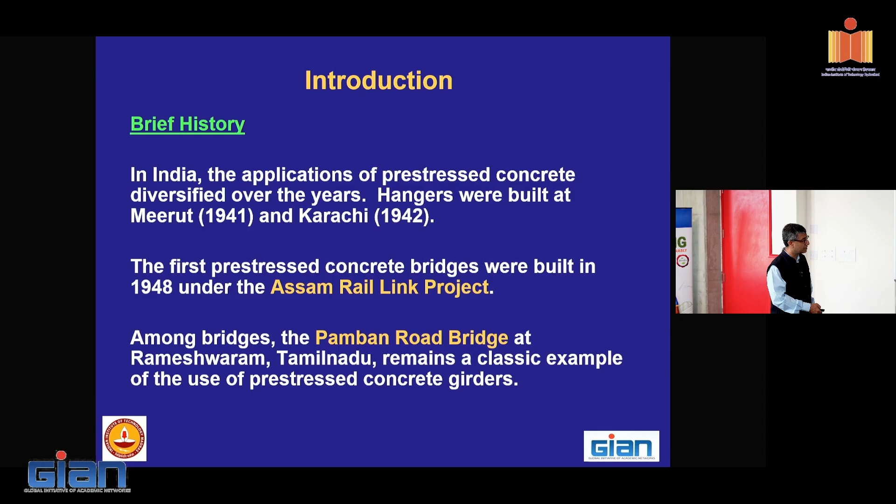Whenever I teach an application-oriented subject to my students, I always speak about the pioneers of our country, because many times our students are not aware who the pioneers in our country are. But we should have faith that we do have several role models.

In the Assam Rail Link project, the person who was in charge was Karnail Singh. There is a nice report by him, a complete story of the Assam Rail Link project. It's quite a vivid document of the full project, and it is available on the internet. And he got help from John Gammon, who started the company called Gammon India Limited.

From Gammon India, there is one person, V.N. Heggade, who is still there, who has written a wonderful article, Evolution of Precast Segmental Technology of Bridges. These are a few names who were involved in this Assam Rail Link project.

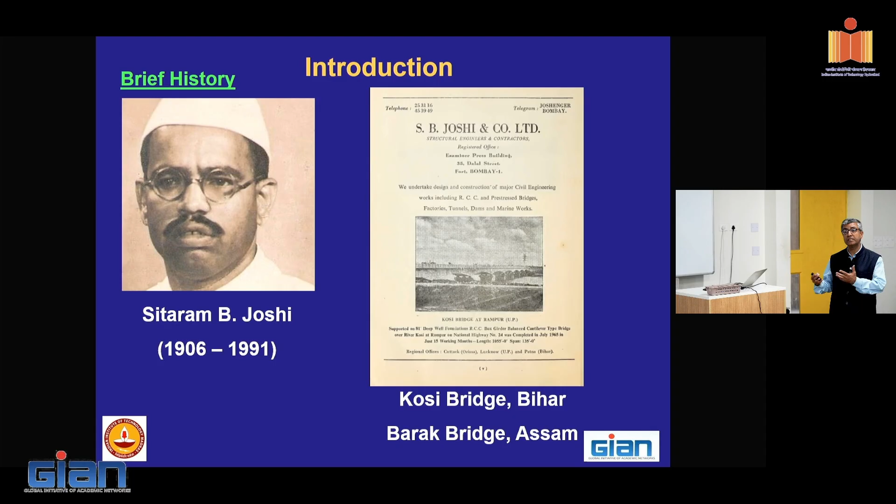Another person, Sitaram Joshi, he was Gandhian in his philosophy. He used to wear that type of dress. But you can see this way back, right after independence, this is a copy from one advertisement of his company, which was making Prestressed concrete bridges. At that time also we were aiming for Atmanirbhar Bharat.

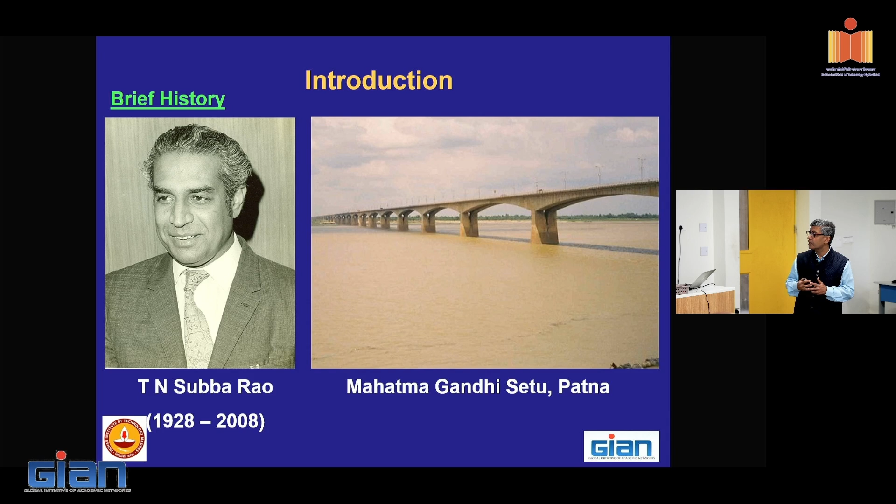T.N. Subba Rao from Gammon India was a pioneering person who has developed, and who is associated with John Gammon, and he has been felicitated in Europe. These are the wonderful Prestress bridges which have been done by Gammon India.

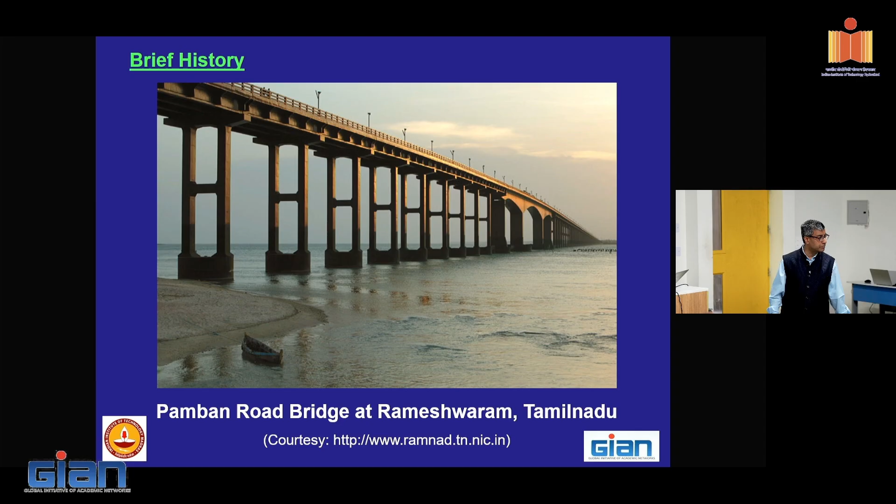This was built around the 1970s, I think 72, 73, whereas the drawbridge was built around 1911 or 12. And the drawbridge again has been refurbished. Chander Alimchandani from STUP has been felicitated by the FIB, the European Concrete Society. His company, STUP, has also been very much involved in Prestressed concrete.

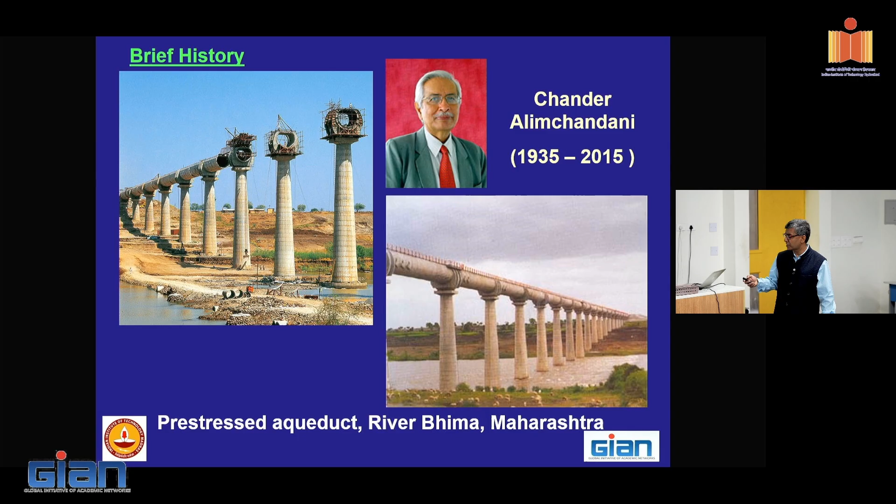Mahesh Tandon, today in fact Mahesh Tandon is in IIT Madras, speaking in the Institution of Bridge Engineers conference there. Mahesh Tandon was educated at the University of Hawaii, and his company, Tandon Consultants, did a lot of work on viaducts, metro viaducts. Another person of his company, Vinay Gupta, gives a lot of seminars.

Coming to advantages of Prestressed concrete. Why do we go for prestressing? The initial thought was that if we can have concrete to be uncracked under service conditions, then the durability improves. And definitely that's a big advantage, that due to it being uncracked under service conditions, we can have increase in durability. This is something our generation is facing, that it is not that every time we will be constructing new stuff.

You have to rehabilitate the existing stuff. If we can delay the need of rehabilitation, that is definitely better, and prestressing is beneficial in that.

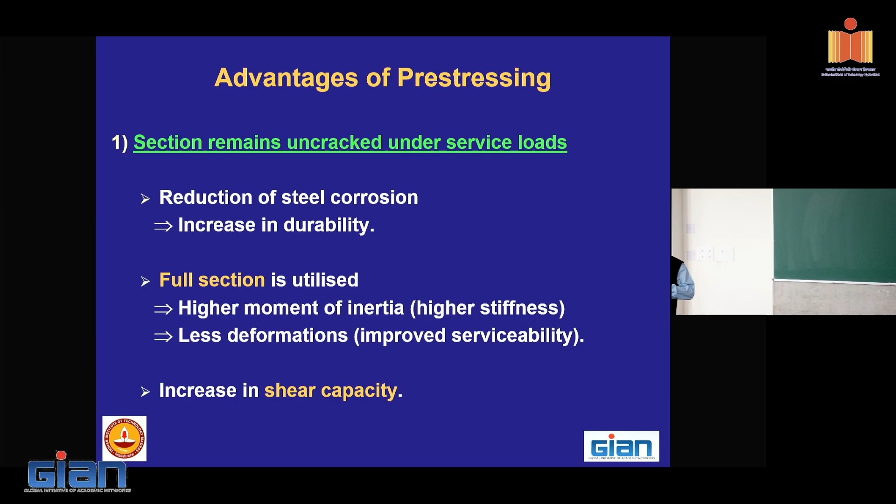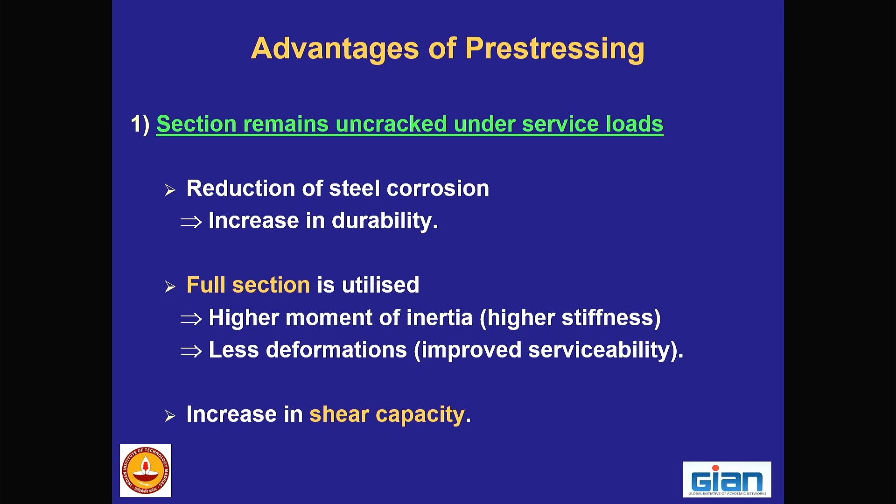In terms of the design, full section is utilized in terms of section properties. We can use the uncracked moment of inertia, and it improves the deformations, and we also get benefit in shear capacity.

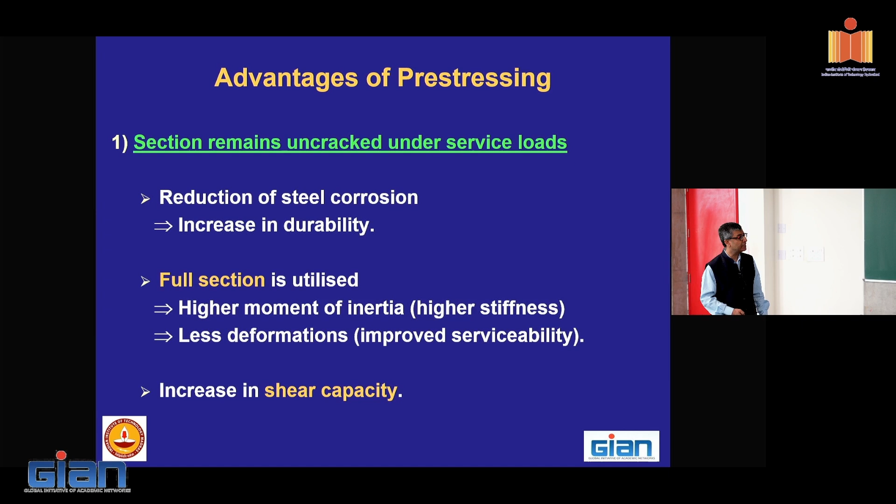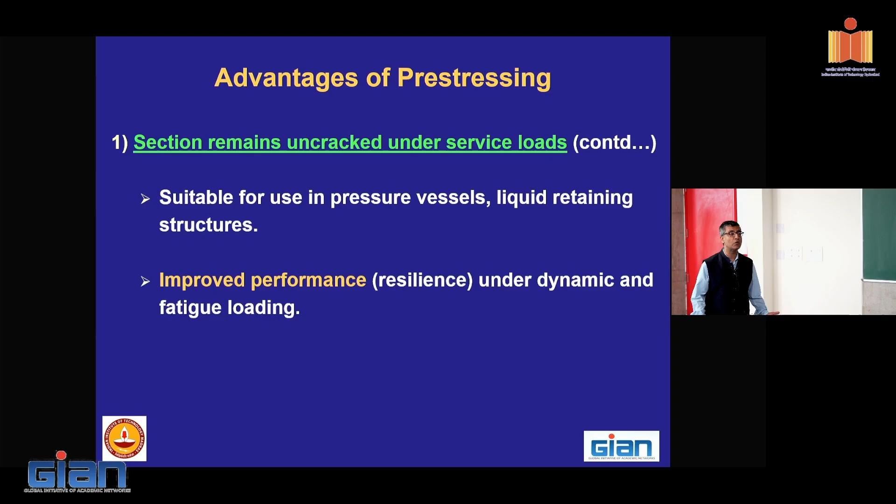If you are talking of any liquid retaining structures or even very high-end structures like nuclear containment structures, then definitely we go for what is called leak proofness, and there prestressing is beneficial. If you're talking of dynamic loads, repeated loads, like fatigue issues, we can go for prestressing, like railway sleepers.

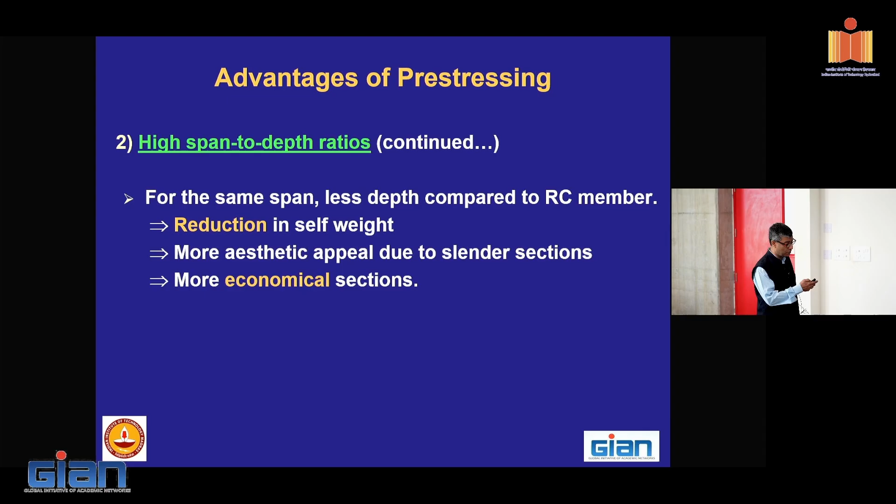And the corollary is that once we can go for a reduced depth, it leads to a reduction in the self-weight. For bridges, this is a factor, because in bridge design, the self-weight moment itself is substantially high, comparable to the live load moment. Now, if the self-weight moment can be reduced, then it is advantageous in terms of design. We can have an economical solution.

However, what are the challenges? These same challenges are there in precast also. Skilled technology - in our country, sometimes even our students think that what is there in concrete? You just mix something and pour something. But no, we have to go for very high quality products. Both pre-stressing and precast need skilled technology. Use of high strength materials is costly. Yes, if you are talking of ultra high performance concrete, we can solve many problems, but we also have to pay the price.

There is additional cost in auxiliary equipments. For pre-stressing, if you are a contractor, you have to bring in those equipments, and we have to have the quality control and inspection. Same applies for precast, that in order to get the benefits, first you have to pay the price in terms of good inspection.

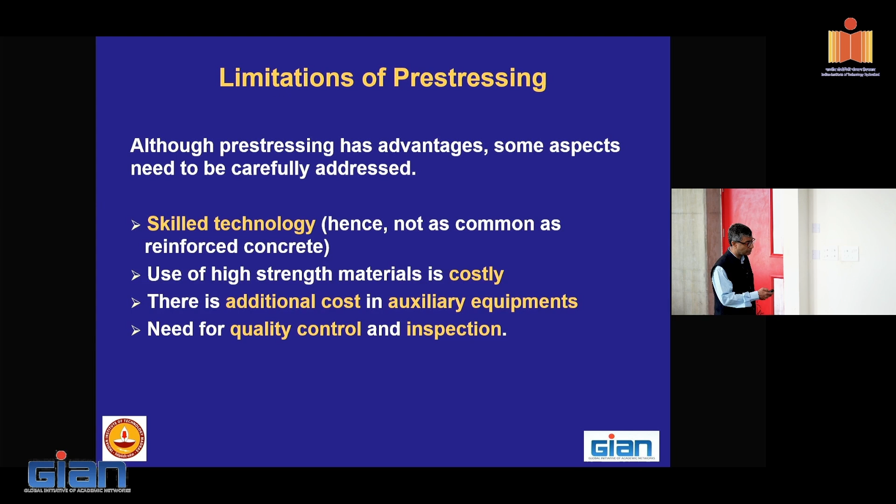Now, the types of pre-stressing - there are different ways of classifying. It can be how you are applying the pre-stressing force. Typically, we apply that by hydraulic jacks, but there are other ways of applying.

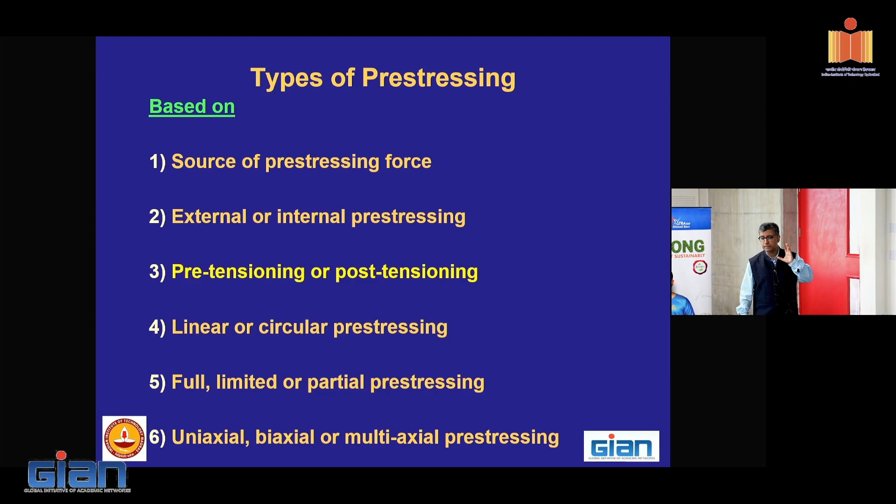External or internal - this is more used in bridges, that our ducts can be inside the section or the ducts can be outside the section. Outside the section does not mean that they are always visible. Like in a box girder, the ducts can be inside the box, but not within the section. And their analysis is slightly different compared to a duct which is inside the section.

Now, this is the classification today which we will be talking about - pre-tensioning or post-tensioning. I will come into that later. Linear or circular - for most of the linear members like girders or slabs, although the profile may be slightly curved, we say it's a linear pre-stressing. Whereas if you are going for pre-stressing pipes or containment structures or domes, then these are circular pre-stressing.

Full, limited or partial - this classification is more of a design perspective. In the earlier days, the idea was that we shall have concrete uncracked under service condition, that is called full pre-stressing. But then it was found that that is uneconomical. Most of the time we do not have the characteristic load, and if you are targeting uncracked under characteristic load, then it is uneconomical. Hence we say that, okay, let it crack under the characteristic load, but most of the time we do not see the characteristic load.

As per the definition of the characteristic load, only 5% of the time we may expect it. Rest of the time the load may be much less, and whatever cracks may form in case the characteristic load is there, that will get closed. That is called limited prestressing. That means we are relying on the prestressing to check cracking for most of the time, but need not be for the characteristic load.

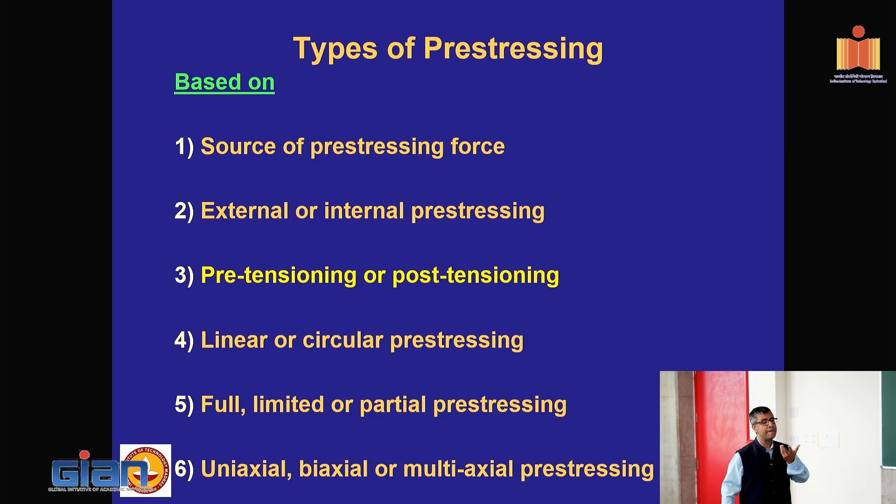Partial prestressing is a very generic term. It means a mix of reinforced concrete and prestressed concrete. Full prestressed concrete is one end of a spectrum, and reinforced concrete is another end. Anywhere in between, a mix of reinforced concrete and prestressed concrete is partial prestressing. You can say that the prestressing is primarily for the dead load, whereas for the live load, I will take advantage of the reinforced concrete. The way you select it is a very case-to-case basis.

Uniaxial, biaxial, multi-axial - in a beam, we have prestressing only in one direction, whereas in a slab, we can have prestressing in two directions, and for a dome, we can have prestressing in like three directions.

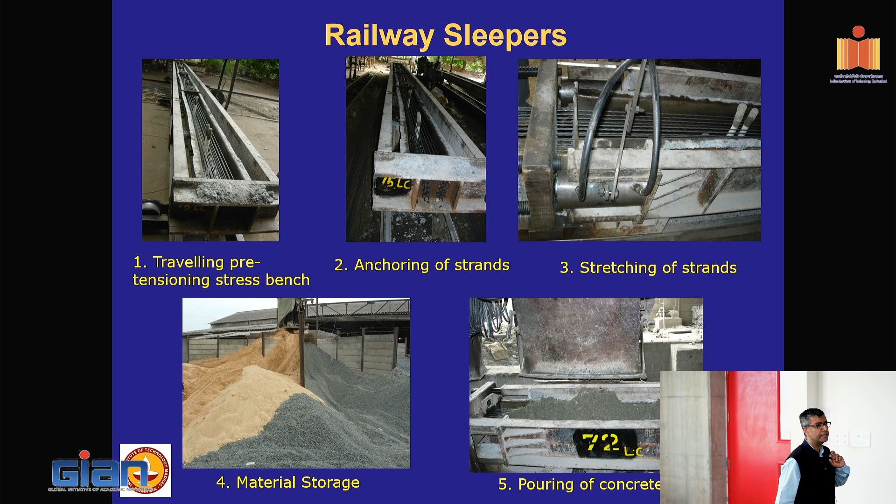Okay, trying to quickly go through the process. Pre-tensioned is typically used for members which are produced in bulk. It is easier to produce smaller members in bulk like railway sleepers, but we can also have bridge girders which are being pre-tensioned. Now, in a railway sleeper, we will be having like a traveling stress bench.

What is a stress bench? It is like a mold with - it's a self-straining frame, I would say, not a mold, self-straining frame which can move around on rails. First, inside this self-straining frame, there is a mold. We are putting the strands, we are anchoring the strands, then we are stretching the strands, and this can be monitored by some scale or some pressure gauge. Once we have stretched the strand, that's the pre-tensioning.

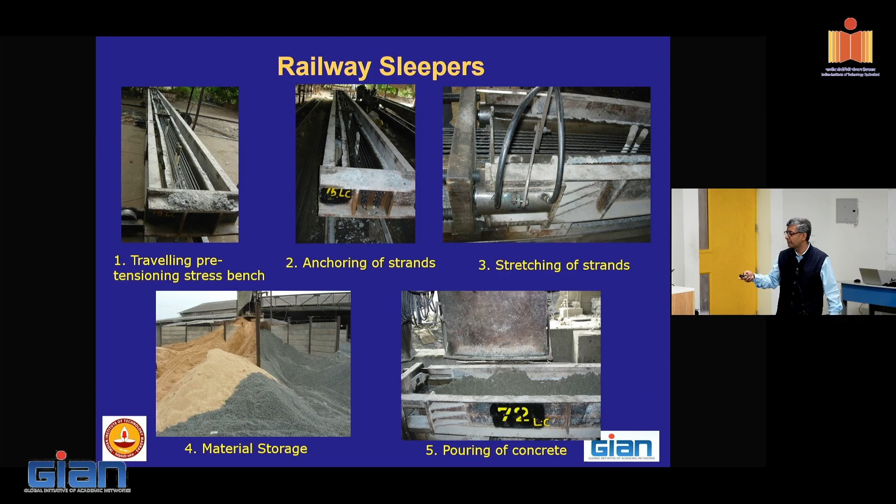Then we are pouring the concrete. We have a batching plant. Through a hopper, we are pouring the concrete, and then we are vibrating the whole mold itself, and then we are pushing this whole stress bench through the rails into the curing chamber, steam curing.

We keep them there for about 24 hours. After that, they are brought out and the molds can be released, because in a factory we need the molds very quickly. They are cut, demolded, and then water cured again for maybe 24 hours, which is equivalent to almost 7 days of curing. That means for another 2 weeks they will be curing separately in water tanks, and then they will be dispatched.

This is a complete industrial process, and if you go to railway sleeper factories, there are several of them in our country. The first generation of pre-tensioned sleepers are now being replaced, which means this industry will go on because this production, these are also precast pre-stressed.

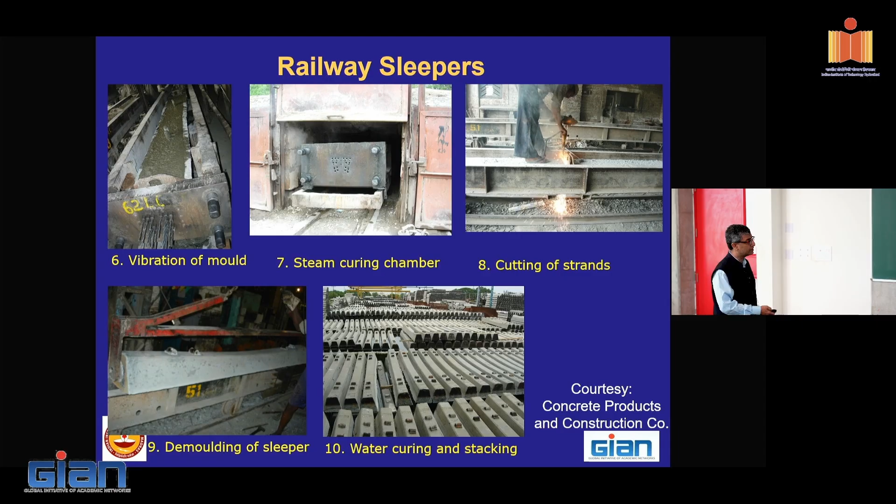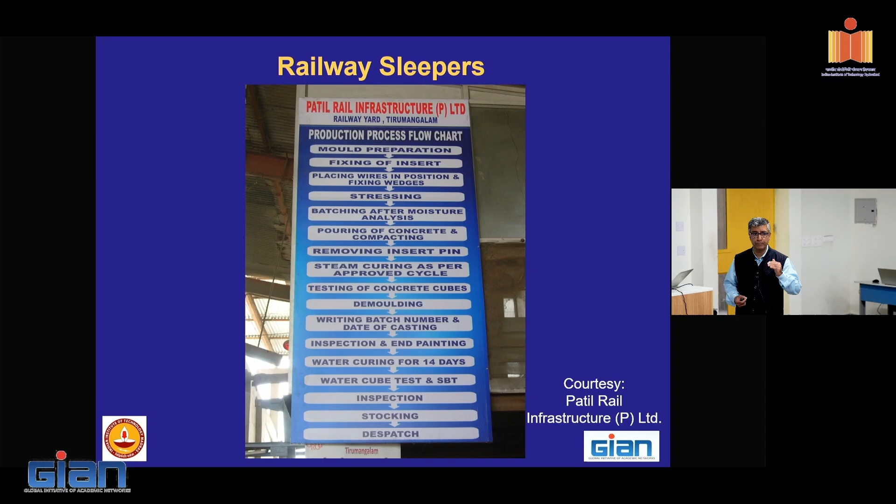Next is the post-tension members. Here also, the way I am talking about post-tension is just with reference to precast. That post-tension can also be used in precast. This is a site which I visited in Ernakulam, a post-tension box girder.

Here you can see the reinforcement has been fabricated, the ducts are placed, then this mold is taken to this casting yard. Once the concrete has been cast, the strands are passed through the ducts, and then against the hardened concrete, the strands are stretched. That means here the concrete is cast first and then the strand is stretched.

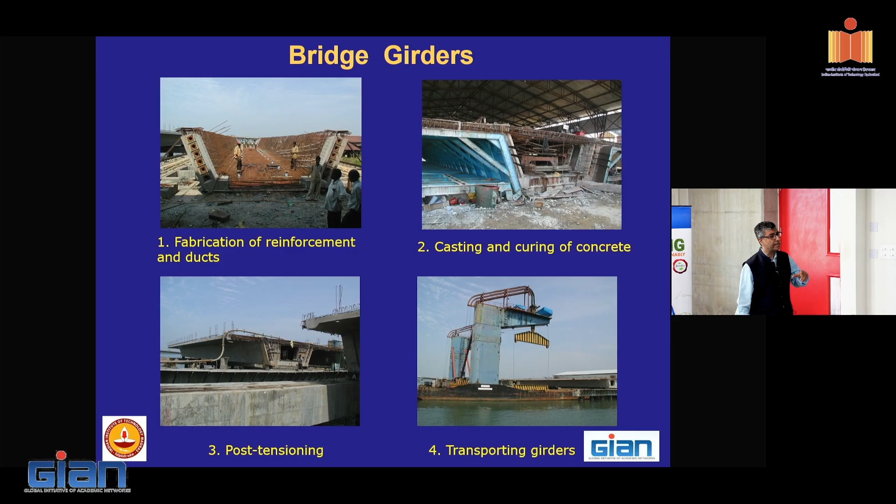And this can be done in stages. That means a few strands are stretched at the site, then they are taken maybe through some floating cranes. This was in the construction of a bridge, and then at the final location, again some more strands can be stretched. Now this is the final form of the Goshree Bridge in Cochin, quite a picturesque location, and this was a prestigious project undertaken by the Cochin Port Trust at the time.

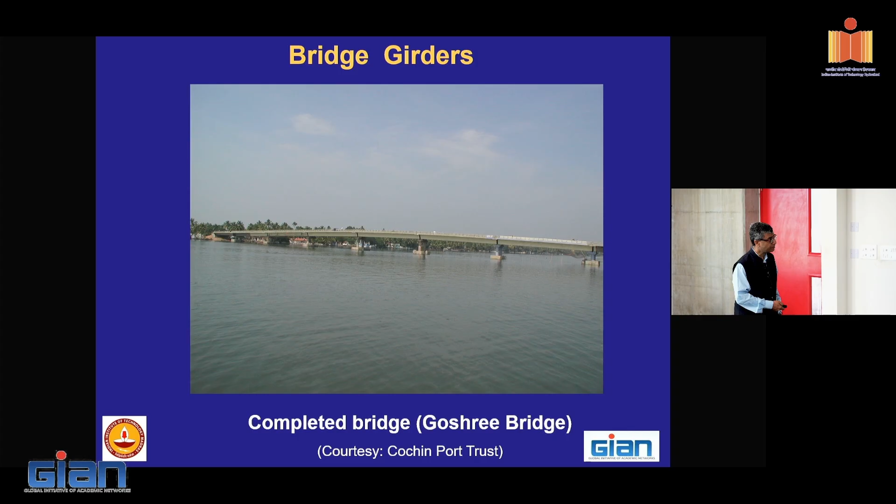Coming to other types of bridge girders, this is from the Chennai Metro Rail project. These are the molds, the concrete is being cast, and these are the anchorage blocks at the end, which are required to reduce the bearing stress that comes during post-tensioning.

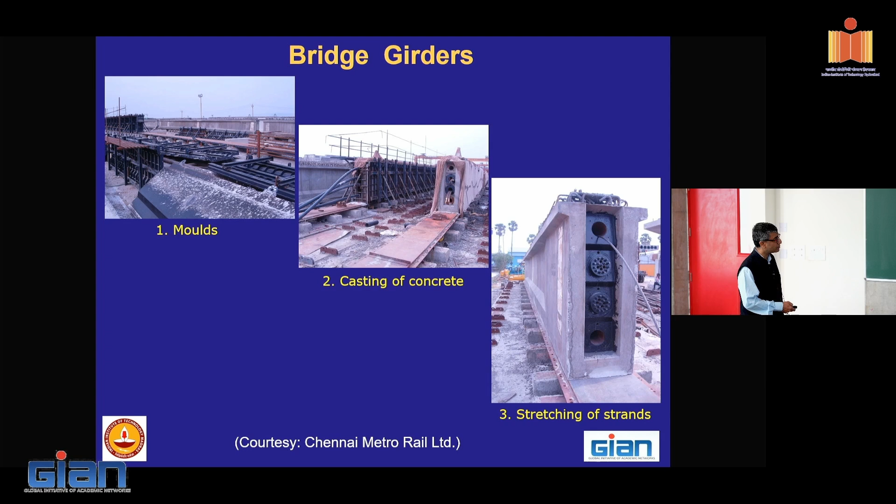Now what are the advantages of post-tensioning compared to pre-tensioning? If it's a very heavy member, post-tensioning can be done right at the site itself; I do not need a factory to do post-tensioning. In our country, bridges were mostly post-tensioned earlier, though now we are seeing pre-tensioned girders coming in. There is also less waiting period in the casting bed.

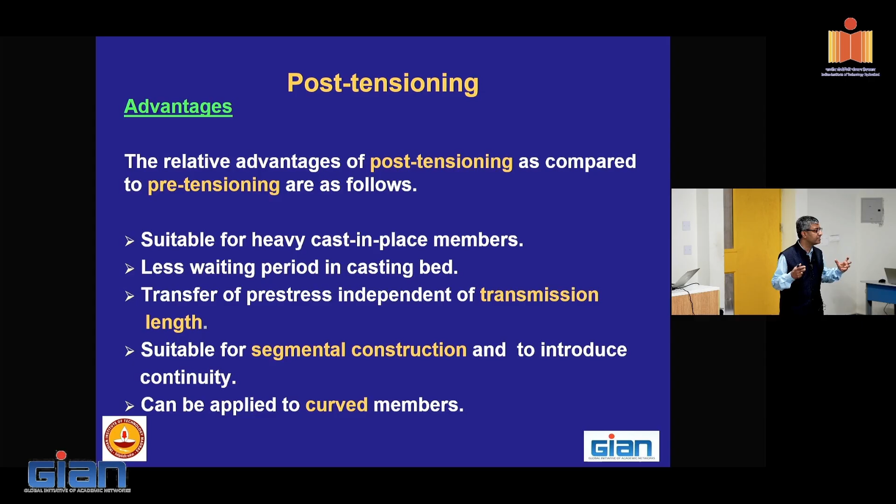What it means is that we are not transferring the stress to the concrete as early as we do in pre-tension. Once the concrete gets a minimum strength, it can be demolded - transfer of prestress independent of transmission length. Here we have physical anchorage at the end, anchor blocks, so we do not depend upon bond to transfer the prestress; it is the anchor blocks which transfer the prestress.

Suitable for segmental construction - this is a technique which has become quite common for viaduct construction. It can also be applied to curved members. Pre-tension members cannot be used for horizontally curved members, whereas post-tension can be used.

Now what are the relative disadvantages of post-tensioning? We need ducts, anchorage devices, and grouting. This is a very important aspect of post-tensioning. In pre-tension, the strands are in direct contact with the concrete, so there is good transmission of bond, provided the concrete has been cured, and we can have some minimum durability satisfied if the concrete is of good quality.

Whereas in post-tension, there is a duct which is a void. Through that we put the strands, and then we grout it, and the grouting should be high strength and non-shrink. We expect the grout to fill up the full space, which itself is a challenge, and how durable this grout is, that's the challenge.

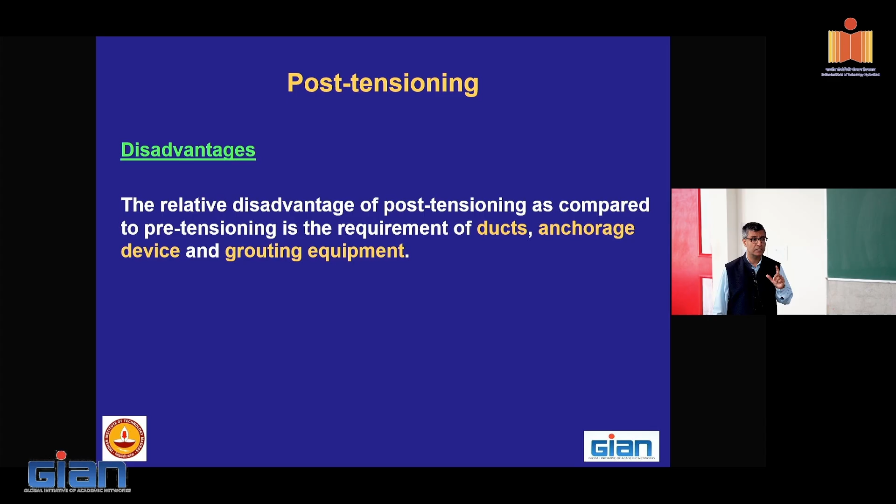In our country, we are in a hurry to have our infrastructure developed, but this is one area where the future will tell how well we have done it.

Professor Radhakrishnan is very much passionate about talking about grouts.

Now, what are the devices we need for post-tensioning? We need a casting bed. We do not need any pre-stressing bench as such, because we are doing the pre-stressing against the member. Of course, we need mold and shuttering. We need ducts, anchorage devices—very large anchorage devices. Jacks, couplers if you are going for continuous members, and grouting equipment.

Why I have written optional is, in a country like US, sometimes they do not go for grouting in post-tension slabs, because they say the slabs are building members which are in an interior environment, so let's get rid of the grouting. By that, they're reducing the cost. In India, the precasters don't take the risk—even for post-tension slabs, they go for grouting.

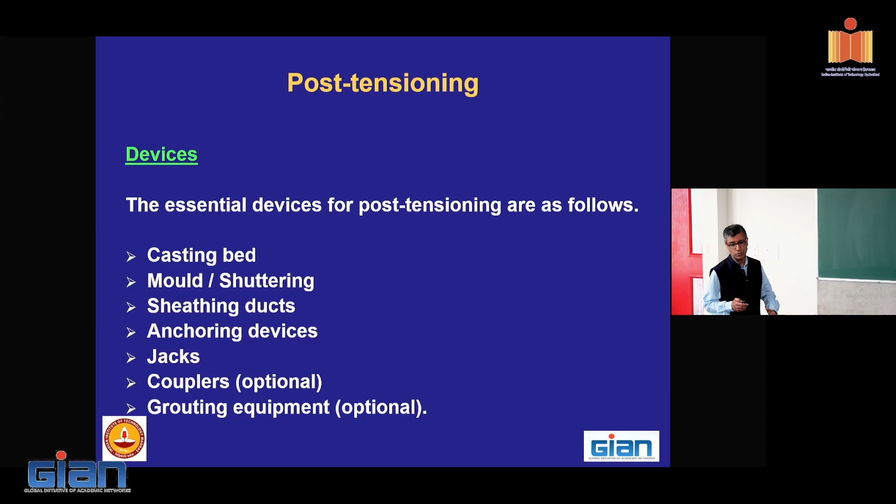So without grouting, there will be a gap between the concrete and the strand. Then the analysis is different. The unbonded post-tensioning analysis is different compared to the bonded post-tension—that is one difference. In terms of durability, you have to use special purpose strands which are encapsulated so that you can increase their longevity.

If suppose there is no anchoring... No, the anchoring has to be there. Anchoring is there, it's already along with the member.

The nice thing of unbonded is, these days they are going for a mix of bonded and unbonded tendons. The reason is, unbonded tendons you can replace. That is a nice aspect—if in future you suspect you need to upgrade, you keep some extra ducts free. You can put some strands later on, or replace some of the unbonded strands with new ones. This is also done especially in bridge girders, they keep extra ducts in place because we are not sure how well they will perform 50 years down the road. We have a provision to strengthen them in future.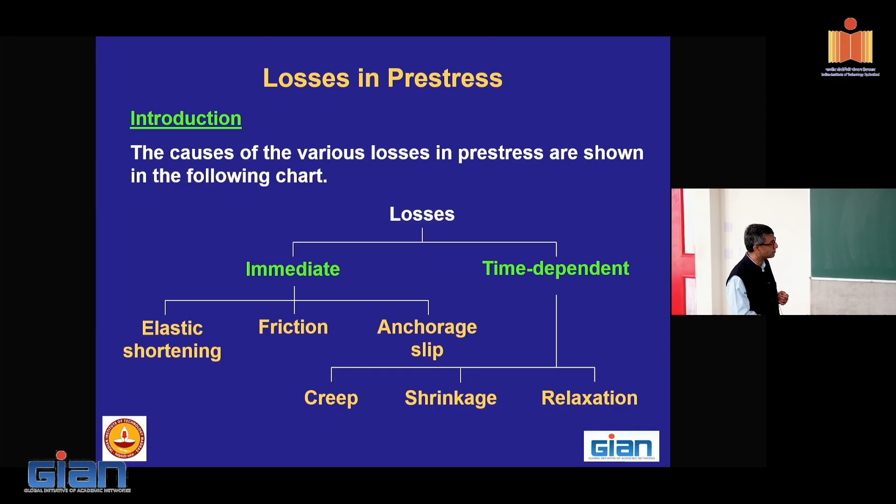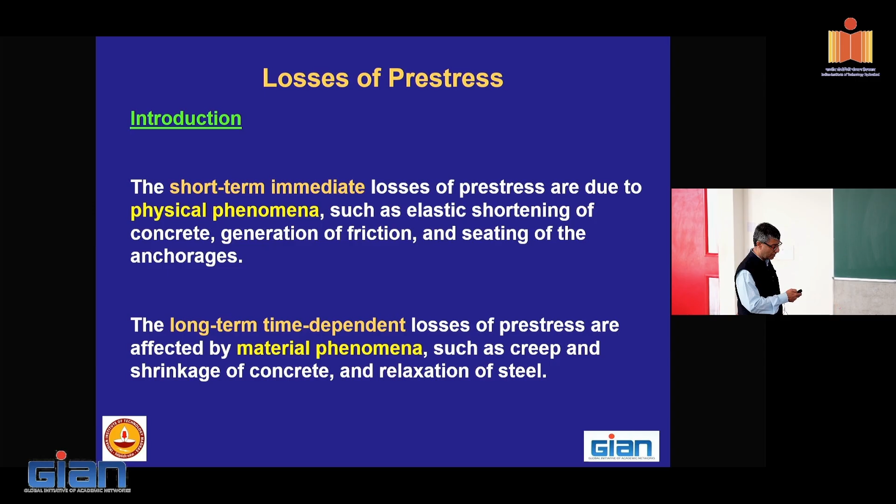This is the write-up: the short-term immediate losses are a physical phenomenon, whereas the long-term time-dependent losses are a material phenomenon. Again, as I said, this is just 3 slides on losses, which I typically cover in at least a week or two weeks. Next comes the analysis.

Now, this is important for this particular course. First, to understand the effect of pre-stressing on the stresses. A very important aspect of prestressed concrete is the computation of stress, first at the transfer. At transfer, the concrete is still not strong enough. It depends—the contractor will try to transfer the pre-stress as fast as possible to release the molds. But you, as an engineer, will say, no, please wait, let the concrete mature properly. Only then should you transfer the pre-stress.

The stress check here is for an axial member, like a railway sleeper. The stress in the concrete at transfer is the pre-stressing force that you are recording, P0, divided by the area of the concrete. The sign convention I am using is that compression is denoted as negative. Now this P0—there can be some short-term loss due to elastic shortening that you have to be careful about. And this is the stress. First, you have to make sure that it is within the allowable value of pre-stress for that particular age of concrete.

That means if I am transferring the pre-stress after 24 hours of steam curing, which is equivalent to 7 days of moist curing, then whatever strength it is supposed to gain in 7 days, there is a corresponding permissible stress, and this particular stress has to be less than that permissible stress.

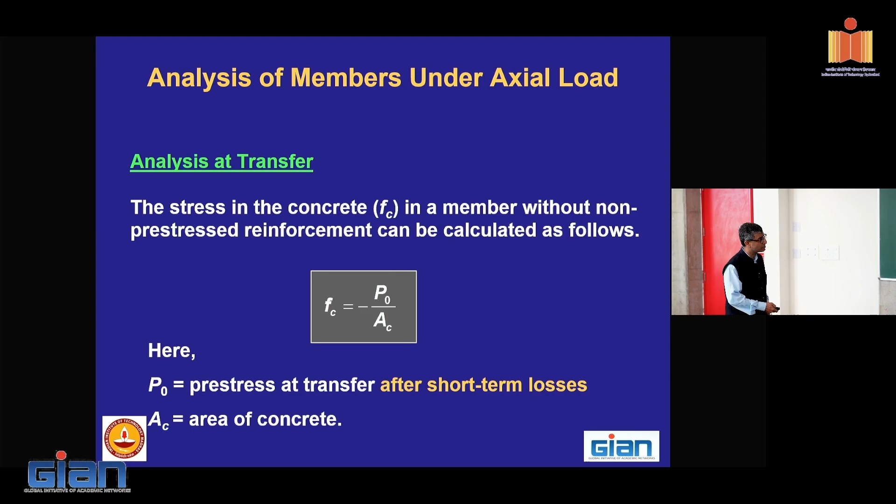Next comes the analysis at service loads. Under service loads, the first term is similar to what we had seen earlier—due to pre-stressing, there is a permanent stress. However, please note, the pre-stressing force will gradually drop over a period of time. Hence, from P0, we now say that at service condition, the stress is denoted as PE, which is the effective pre-stress after a certain time. To this pre-compression, we are adding whatever stress comes due to the external load. If the external load is tensile, it is a positive sign; if the external load is compressive, it is a negative sign.

Axially loaded members typically are members which are under tension, like railway sleepers, because the tension comes to the bending, or it can be ring members at the base of domes, or it can be some tie members.

Hence this pre-stressing component will typically be positive—it's the tension which is coming, and in the denominator we have the transformed area, a more precise way of saying that the steel is also participating along with the concrete to take tension. Now this stress should be less than whatever is the allowable value under service condition.

Now coming to the members under flexure. Why is the analysis important from the structural design point of view? First, right now we just say the permissible pre-stress based on allowable stresses at transfer.

For pre-stressed concrete, whether pre-tension or post-tension, whenever you are transferring the pre-stress, that itself is a critical time for the member.

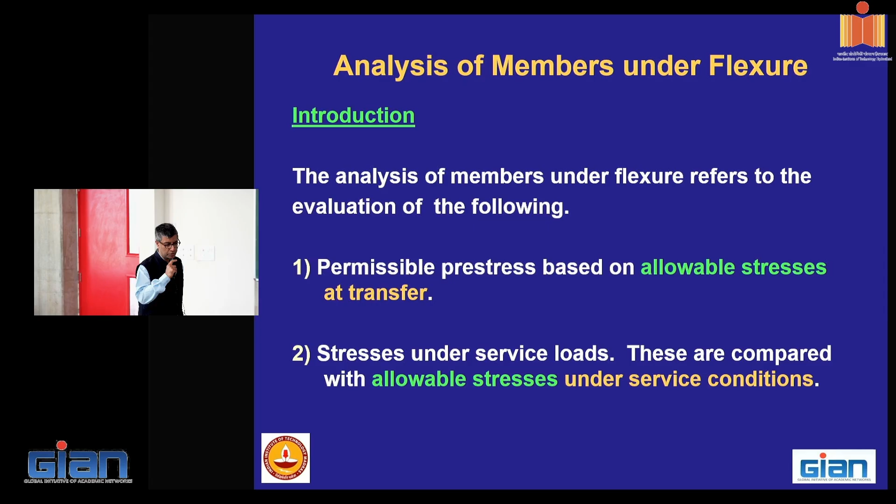I have seen when I went to Coimbatore PSG Tech, one day I was walking in the morning and they were jackhammering an overbridge across the road in front of PSG Tech. I said, what happened? It looks like a new construction. They said that during post-tensioning, this concrete cracked. Now the university management is saying they will not accept it, it has to be demolished. That means the contractor had to demolish a newly constructed bridge which cracked during the post-tensioning.

Hence it is very critical—it is easy to give a lecture in the room, but it is a difficult thing in practice because concrete can have weak spots, it can be variable throughout the length of the bridge, and hence we have to be very cautious that during the time of transfer we have sufficient material strength data to decide whether we can transfer the pre-stress or not.

Next, under service conditions, the stresses also have to be within the allowable values. Why? Mostly it is because of creep. Unless they're within the allowable values, concrete under compression will undergo creep.

Concrete under tension may go from small tension to higher tension, which is not desirable. Hence we have to check and make sure that the stresses under service loads are within the allowable value under service conditions.

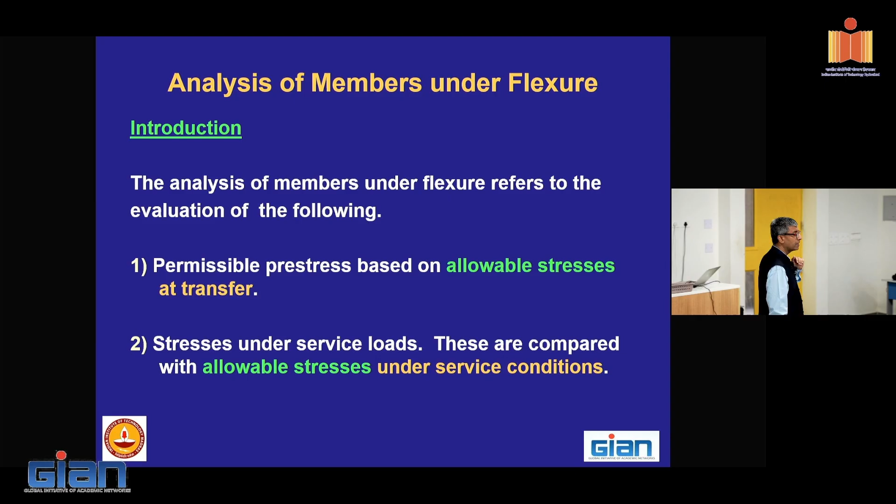Now please note, in a bridge these checks are actually much more involved than just a one-line statement. If you're familiar with the code IRC 112, Indian Roads Congress Code 112 for bridges, there are different types of load combinations: transient, rare, frequent, and based on that there are different allowable stress conditions.

In a bridge, some loads may appear temporary but are there for quite some time—there are definitions of when a load is considered frequent. Then there are loads like the class 70R vehicles, which are called rare loads. We don't have to worry as much about the rare loads, and hence the permissible stresses are raised for those rare load combinations.

Hence, compared to buildings, if I am having bridges, these checks are much more involved. In buildings it is relatively straightforward. Our service conditions typically are checked against the characteristic demand.

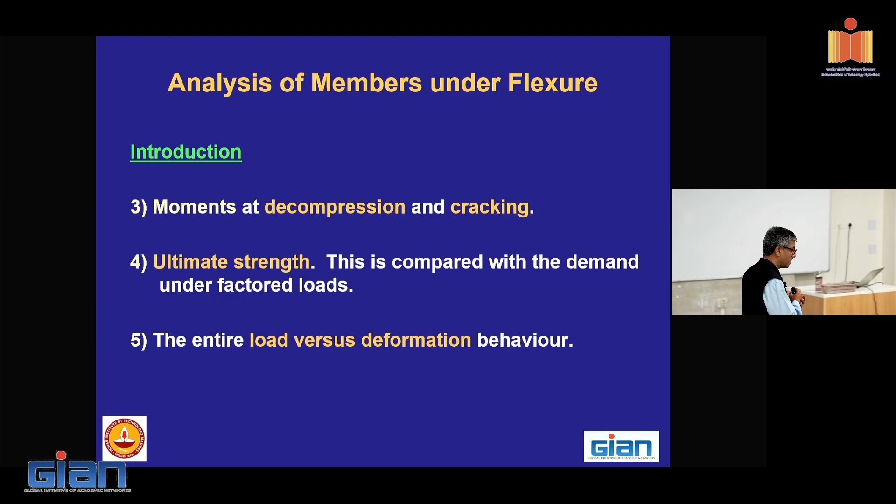Next, it's very important to understand the behavior of a member. What is meant by behavior? It means not just the strength a member has, but if you keep increasing the load, what is the deformation, how much it is going to bend, how much is the curvature. That gives an idea about what is called ductility.

I'm pretty sure Professor Sri will be talking much more about this behavior aspect. Strength is one primary requirement—that is the safety. But then the behavior issues are related to what is called ductility, which is a requirement for seismic design.

Now, in order to get the behavior of a pre-stressed member like a bridge girder, first we have to understand the moment at decompression and cracking. That means, what is the load at which the bottom of the girder will have zero stress? That is called the point of decompression. Any load more than that will create tension, and we do not want the frequent loads to be more than that.

Then what is the moment at cracking? That means any load crossing the load corresponding to the moment at cracking will generate some trouble. Hence, we have to be aware what is the decompression moment and what is the cracking moment. This is one aspect of behavior.

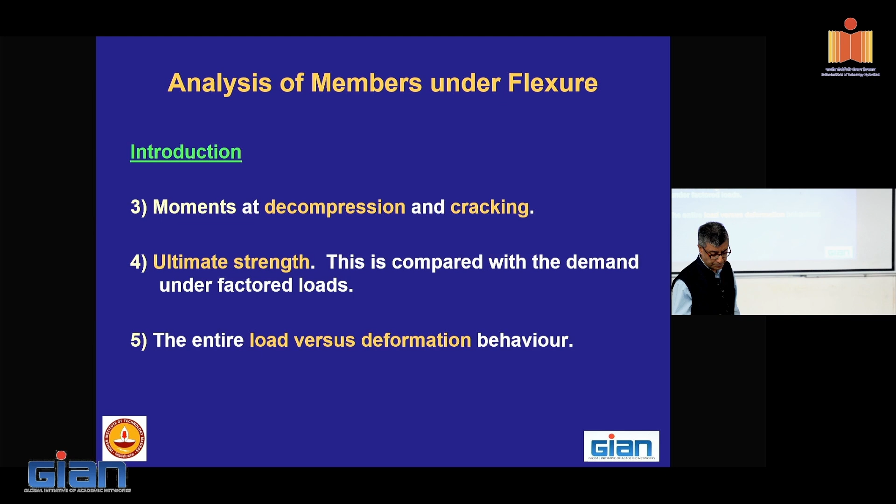Whenever we do the analysis, we have certain assumptions. I tell the students these assumptions may appear trivial, but you should know where they are not applicable—that's the most important thing. First is that plane sections remain plane till failure, known as Bernoulli's hypothesis. But if I am going for deep members, this assumption may not be true, and the method of analysis I am showing will not apply. Hence, you should be aware when not to use the plane-sections-remain-plane assumption.

This gives very important quantitative information: the distribution of the flexural normal strain is linear across the depth of the section. This is where we start our analysis of bending—when we study civil engineering in our second year, this is where we begin. The strain profile is linear, but this is violated if the member is deep.

Here we are talking about straight members with prismatic sections and a vertical plane of symmetry. When is this violated? If I am talking of a curved bridge girder, then this will not be true—other issues come in.

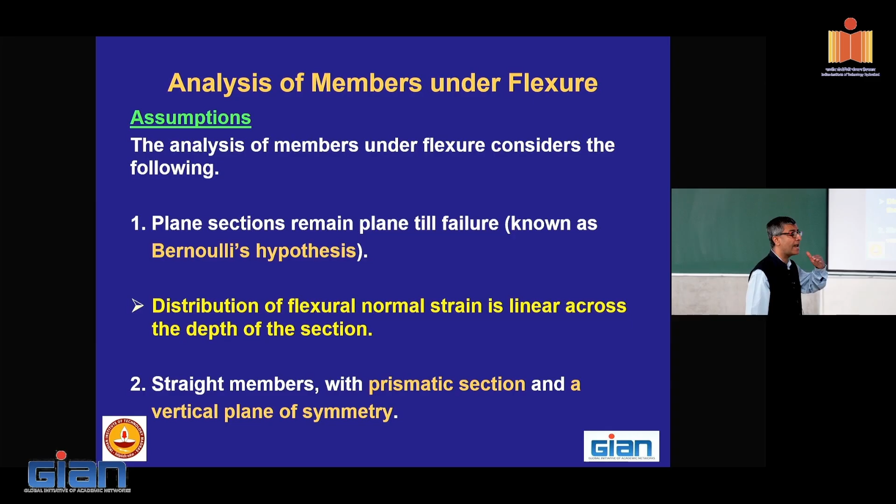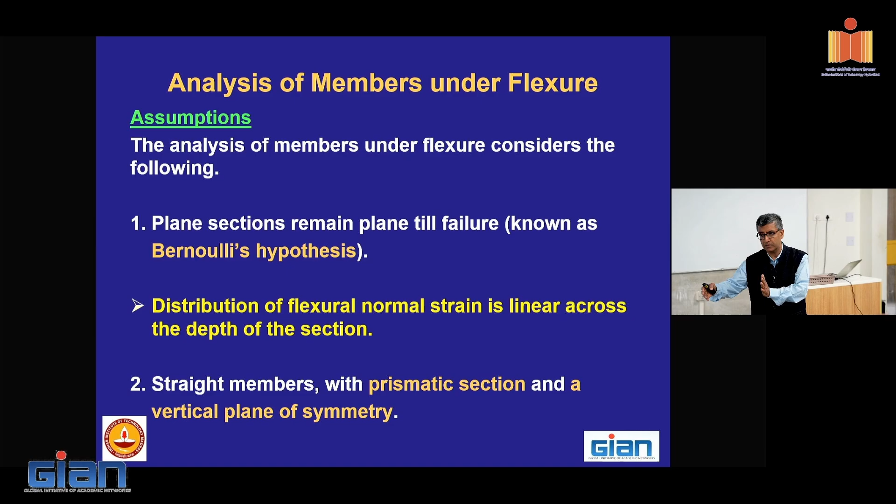In precast members, we face challenges similar to structural steel members, like lateral torsional buckling, while transporting the members. If the members are not symmetric, then these issues are more.

Now since the prestressed members are uncracked at transfer and under service for most of the time, we take advantage of that. What is the advantage? That's what we said earlier, that both concrete and steel can be treated as linear elastic, meaning the stress is proportional to the strain till the service loads.

Once we have this assumption, we can use what is called the principle of superposition. This means the deformation under one type of load and the deformation under a different type of load can be added together when the two loads are acting together. But if you are going to the ultimate, this principle of superposition is not valid.

Another assumption is that the increase in stress in the prestressing steel due to bending is neglected. Whenever a member bends, the prestressing steel will slightly increase in length, but that increase is much less compared to the initial stretching. So for convenience, we say whatever prestressing is there due to initial stretching will go on changing because of losses, but we don't consider any increase due to member deformation itself. This way our analysis remains simpler.

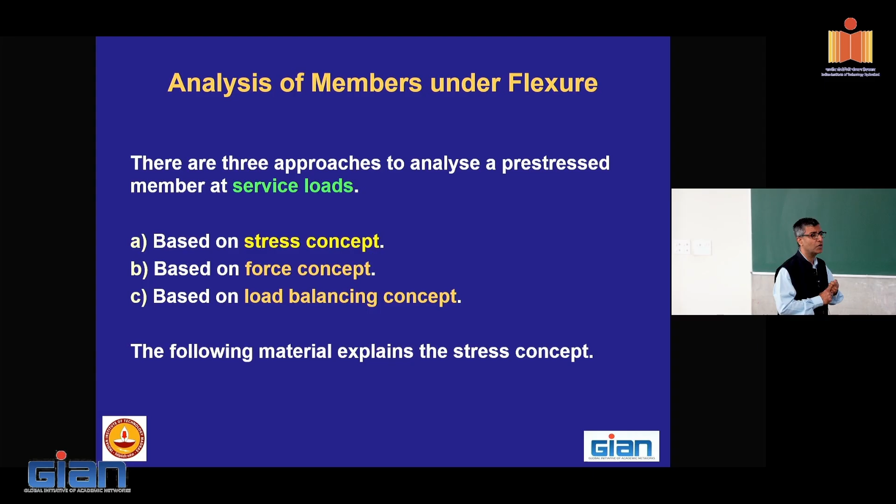Now, whenever we do analysis for transfer or service loads, we are invoking linear elastic theory, and there are three approaches. I am referring to the book by Lin and Burns, a very standard book which our previous generation has also studied, and I also teach from that book. It's very nicely explained there.

The stress concept is the most important one because we need to check the stresses, whether at transfer or at service. The purpose of checking stresses is that they have to be within the allowable value, both at transfer as well as service, for both the compression side and the tension side. That means we typically have a minimum of 4 stress checks.

At transfer, what is happening to the concrete on the compression side and the tension side. At service, what is happening to the concrete at the compression and tension side. Please note, they get reversed. At transfer, as Professor Surya said, the tension comes at the top and compression at the bottom for a typical flexural member, whereas at the service stage it is compression at the top and tension at the bottom.

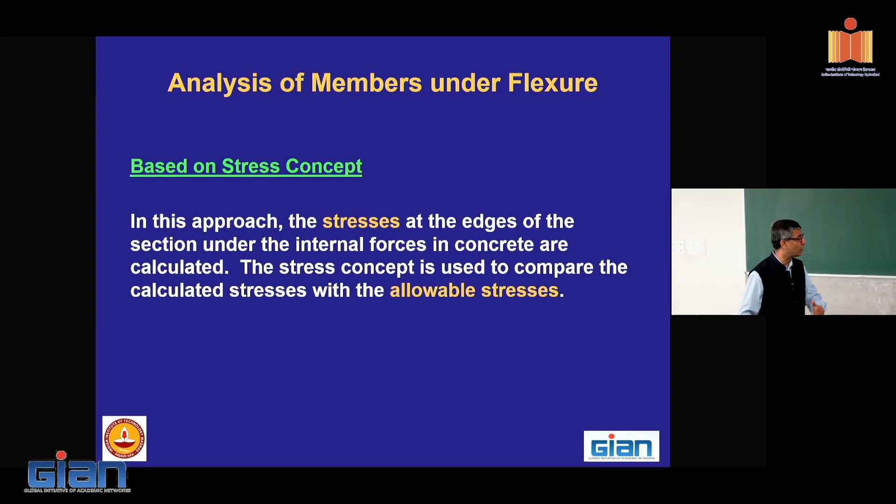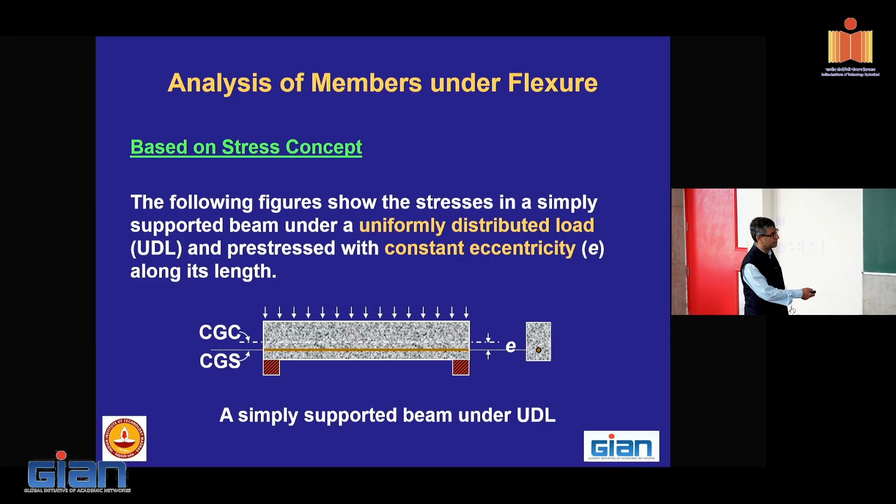This is a very simple member, simply supported, with a prismatic section and a strand at constant eccentricity. In a flexural member, this is another governing variable. In design, we have to determine the prestressing force and also the eccentricity of the centroid of the prestressing steel with respect to the centroid of the concrete section. For this simple case with constant eccentricity, we need to understand these stress diagrams.

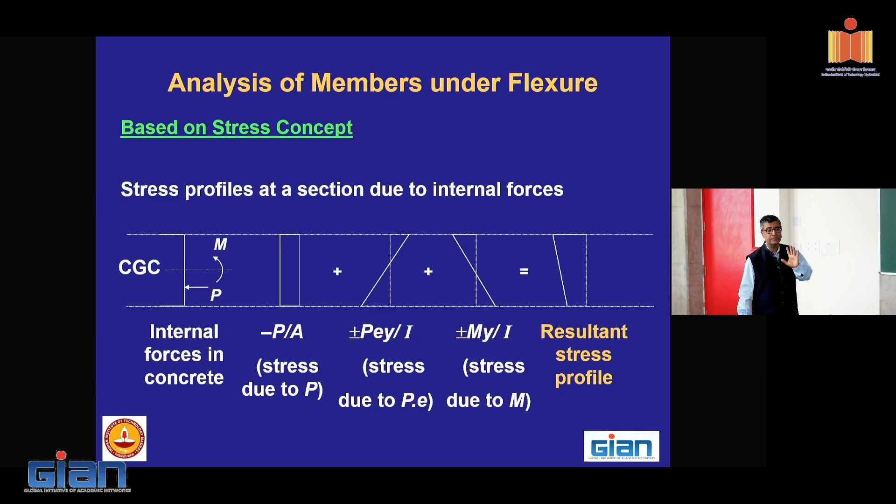My teacher, Professor Belarbi, will not give marks unless you draw these stress diagrams along with the values. At a certain section, say the critical section at the middle, we have the prestressing force and the moment which comes due to its own weight and the service load. Due to the prestressing force, first we have a compression, plus a variation of the compression due to the eccentricity of the prestressing force. Once I understand this, I can write the expressions very neatly. This is what is there inside the member in internal equilibrium. Then comes the external effect, including the weight of the member, which creates a reversed situation, compression at the top and tension at the bottom. The resultant will be somewhat like this, which can have a net compression or it can be a tension if it is a limited prestressing. If I'm able to calculate this properly, that's a proper approach, and you should be able to understand these stress blocks.

The expression for all this is given by this generic form. The first one is the uniform compression. The next one is the varying stress due to the eccentricity of the prestressing. And the next one is the effect of the external load, which also includes the self-weight. The combination of plus minus has to be selected appropriately, and only then can you get the resultant stress at the top and the resultant stress at the bottom. Please note, I have written this in a generic way. This can be used both at transfer as well as service, as well as for any intermediate stage.

For a curved tendon, curved meaning it's curved in the vertical direction, P can be substituted by its horizontal component, which typically we neglect. Especially towards the end, if the tendon is highly curved, then theoretically we should take only the horizontal component of the prestressing force. But since in a bridge girder this curvature is typically less, we disregard this effect, as the horizontal component will be almost the same as the total prestressing force.

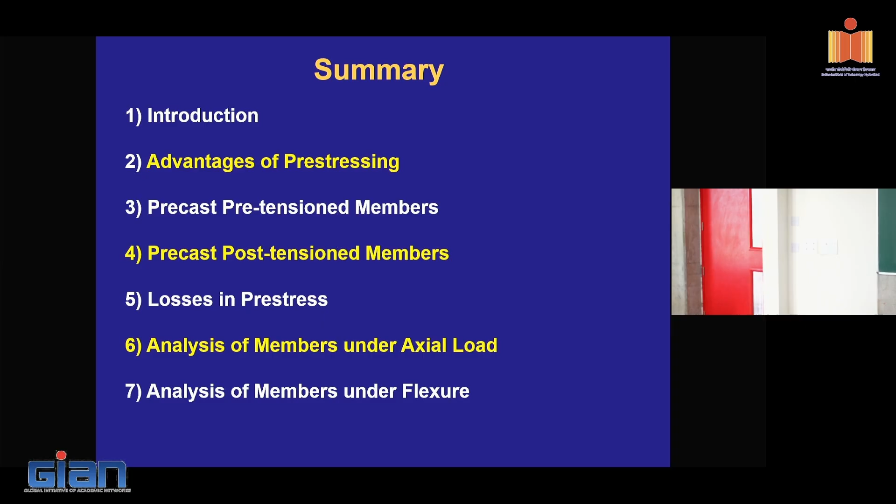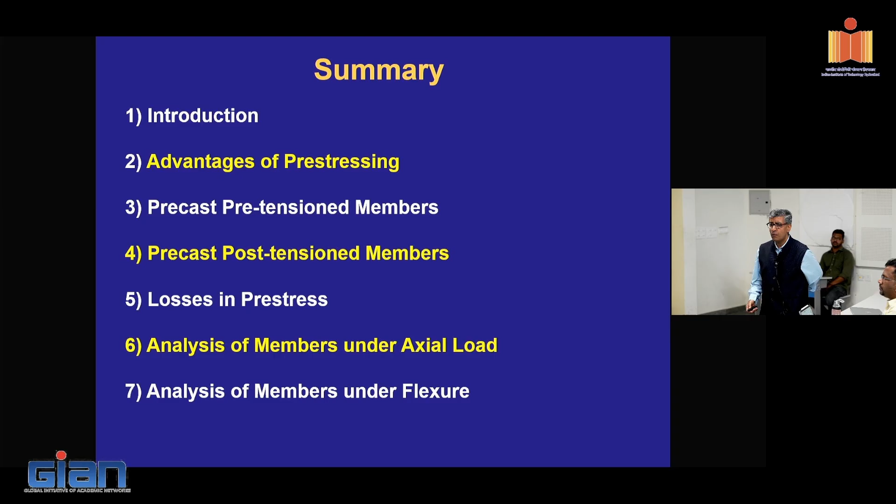What we went through is a quick brush up of prestressed concrete. We talked about the advantages, which we should be aware of whenever we are taking decisions or doing value engineering. Then the pre-tensioned and post-tensioned cases, which have their own uniqueness in terms of the equipment we need, the losses we have, and the construction methodology.

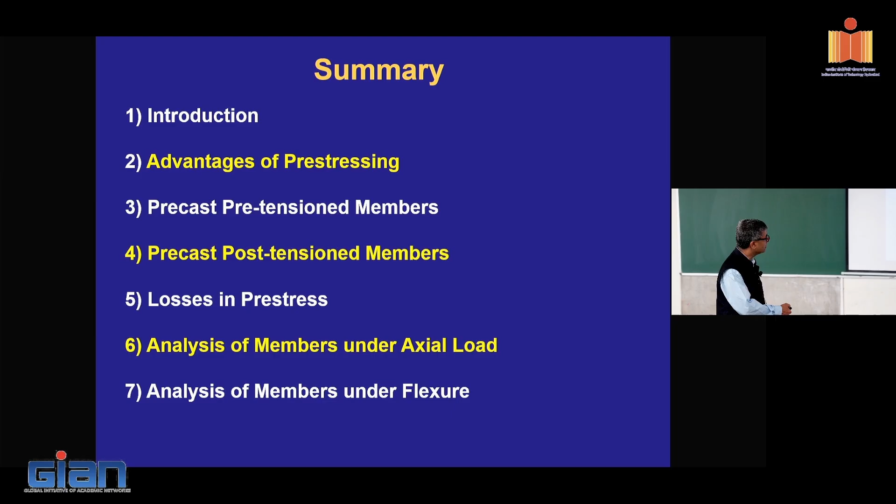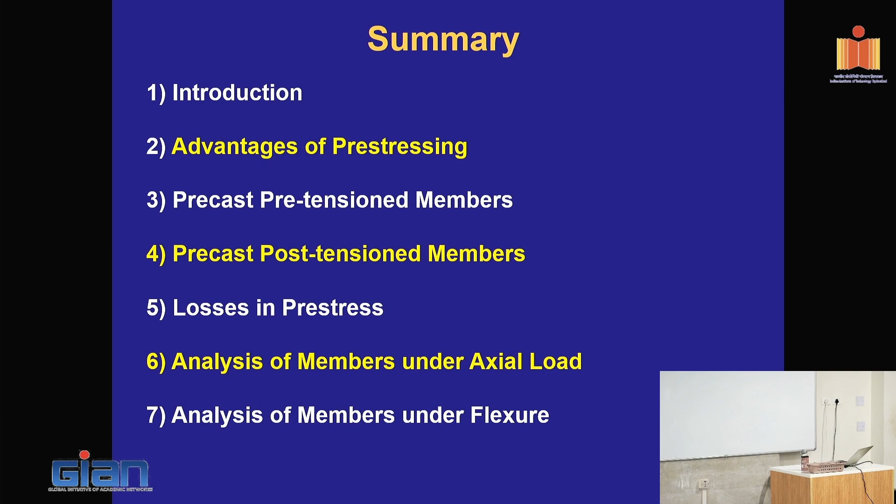Then we did the analysis under axial load first, because that is easy to understand, whereas most of the application is for a member under bending. There I covered only one type, the analysis based on stress. What are the other two methods? The force concept, analysis based on forces, that is used for design of prestress members, but since this course is not covering prestress members in detail, I did not cover that approach because I don't think we are going to design any prestress members here. The third concept is the load balancing concept, used for deflection computations. Those two I just skipped.

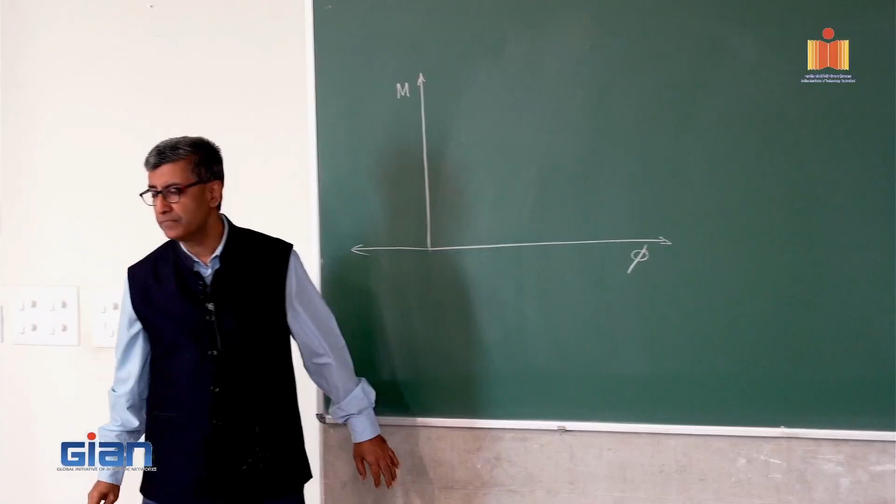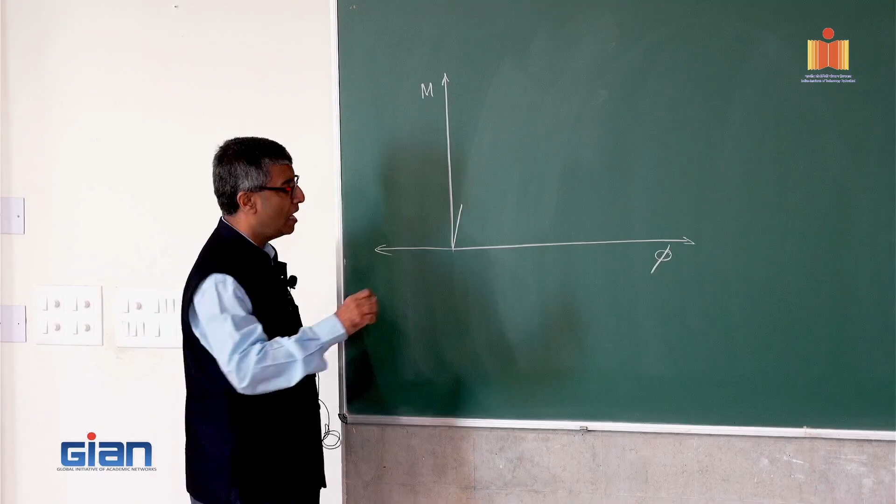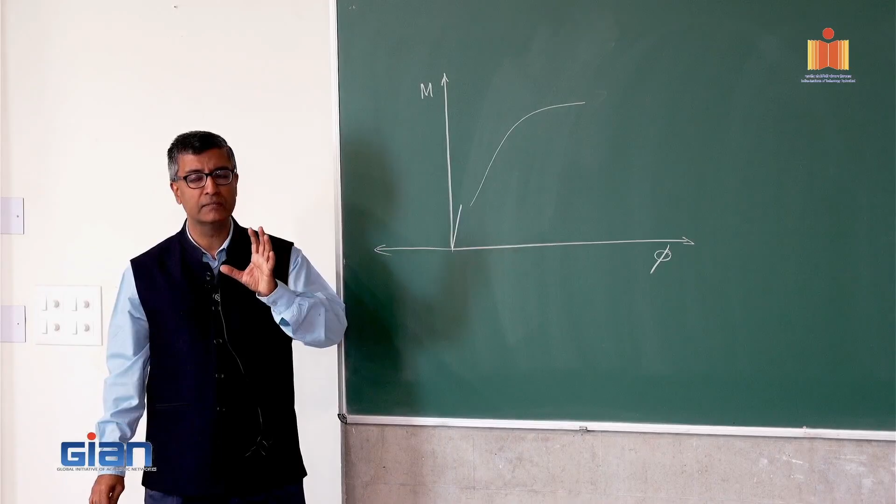If I look into a reinforced concrete member, the moment versus curvature is linear till a certain stage. That is the cracking. Once it cracks, there is a reorientation of the stresses, and now it follows a different trajectory and becomes nonlinear. This is the basic moment versus curvature behavior for a reinforced concrete member.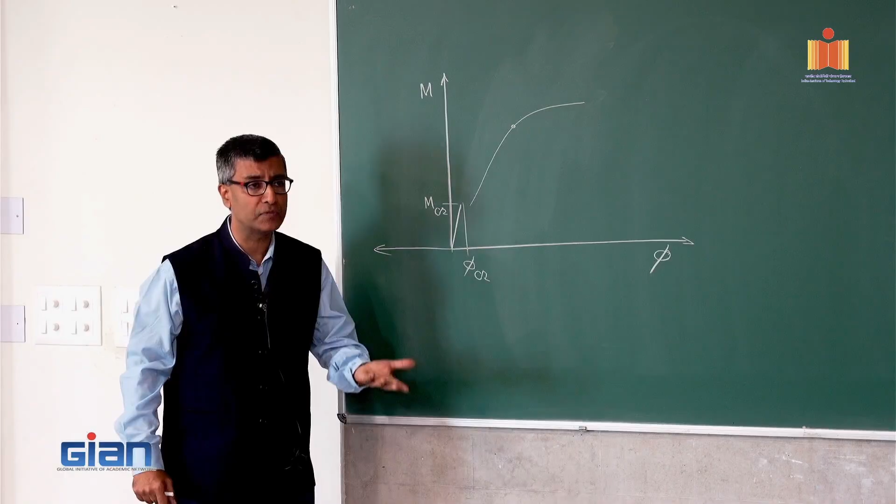This is called the cracking moment, and this is the cracking curvature. Somewhere the steel will start to yield. Now this yielding, whether it is gradual or sudden, depends upon the type of steel. This moment is called the moment of yielding, and the corresponding curvature is called the yield curvature. Finally, when the concrete starts to crush, this is the ultimate moment, and this is the ultimate curvature.

Now, if I try to answer your question, cracking is here, whereas this is the strength. As a designer, what we do is first we need to check the strength, because failure of civil engineering things can be disastrous. Strength has to be checked. Cracking and yielding, this is our serviceable regime. These are related with durability and deflection and all that stuff.

In prestress concrete, this becomes important because we are trying to take advantage of prestressing to reduce durability issues. Hence, if it is cracking too early, like in a partial prestress member, we have to be cautious whether durability will become an issue or not. These are quite different stages. Now this is what is for reinforced concrete. Now, when it comes to prestress concrete...

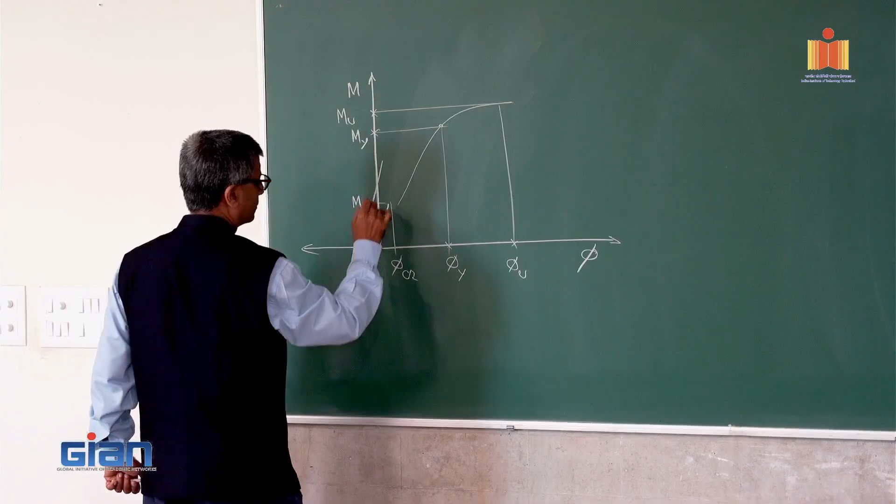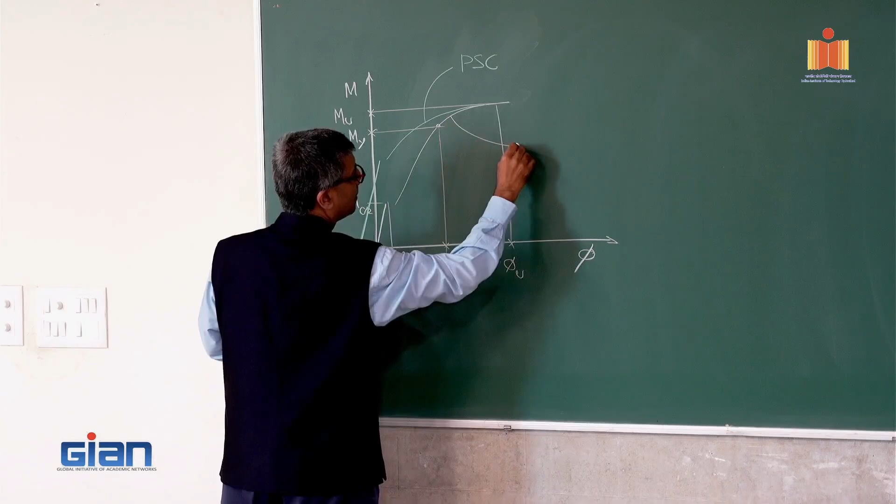In prestressed concrete, for a flexural member, the way we are putting the strand with an eccentricity creates a camber or hogging. Hence, in absence of any external moment, including its own weight, there is a negative curvature, meaning it's hogging. Then, with increasing load, the cracking moment is much higher compared to a reinforced concrete member, equivalent reinforced concrete member. That's where we get the benefit that most of our service loads, if it is in this region, prestressed concrete is staying uncracked compared to an equivalent reinforced concrete which would have cracked.

Now, after cracking, the behavior becomes similar to reinforced concrete. And the way I am saying equivalent means as if the strength is same. So what is the benefit of prestressing? The benefit of prestressing is that the increase in the cracking moment, although the strength may be same.

That means in a bridge girder, finally you're targeting the strength to be same. Whether it is RC or PC, the strength target is same. But if you're adopting prestress concrete, then you get benefit in the service stage.

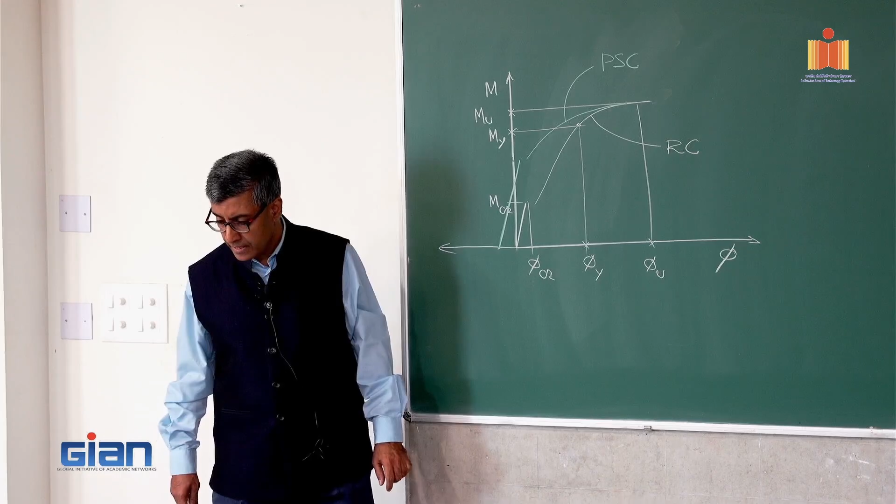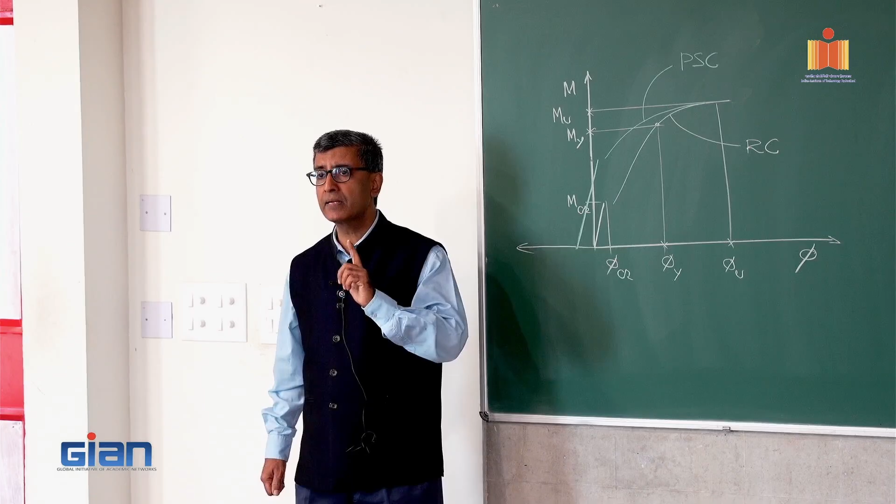Does that mean that the tendons are acting as a reinforcement after the cracking? Yes. After the cracking, the strands will act like conventional reinforcement. The prestressing will be still there, the effect of prestressing is there. But please note, after cracking, the strands will start to yield because they are of small diameter, and hence the behavior becomes nonlinear quite fast compared to reinforced concrete.

In reinforced concrete, we still have a linear behavior. That means the difference between cracking and yielding is large in reinforced concrete, whereas in prestressed concrete, the difference between cracking and yielding is very less. That margin is small.

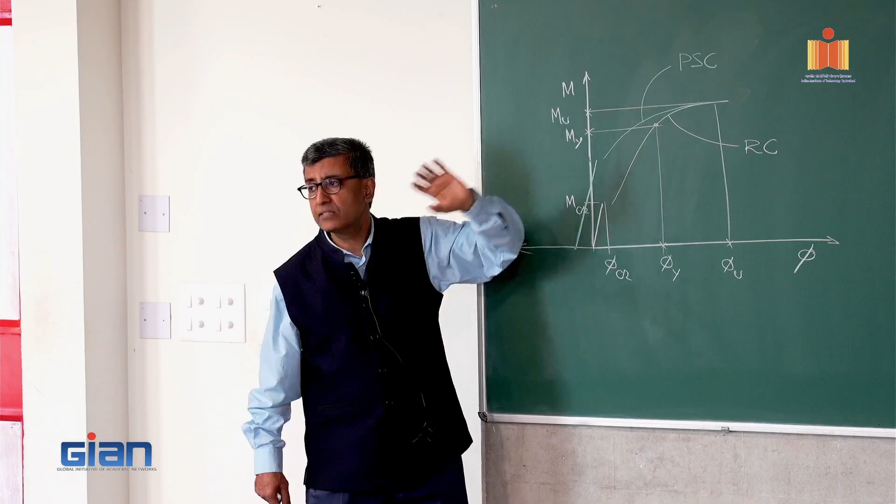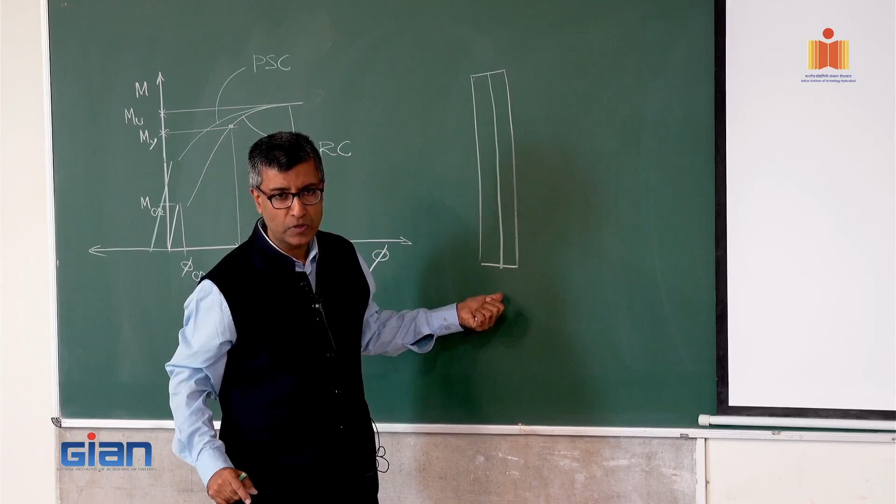Okay, now P-delta effect is something which comes for a compression member. If I just look into like a pile. Although the strands are distributed along the periphery, I am just denoting it as a single line. Please note, in a pile, strands will be distributed along the periphery.

I'll be talking about precast piles in my next presentation.

Now, when it bends, the strand also bends along with it. The compression and tension don't become eccentric, they still are collinear at any section. Hence, prestressing does not involve P-delta effect.

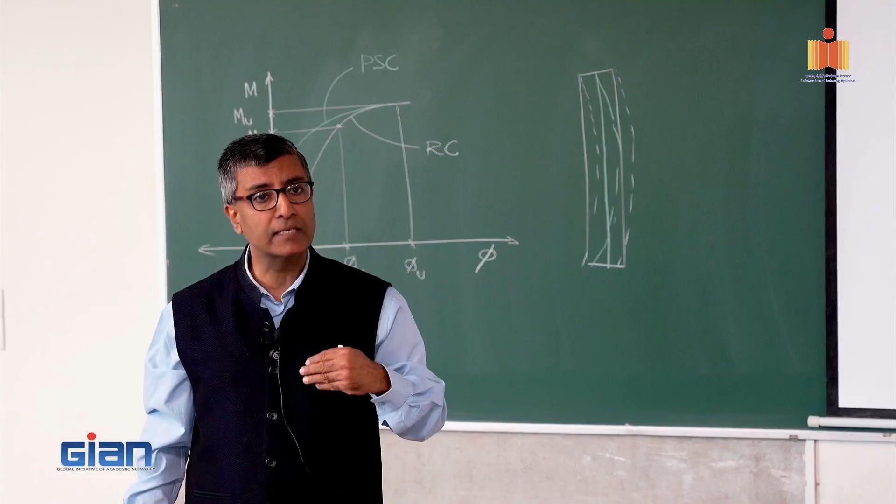P-delta effect comes from external effect. It can become a concern for a prestressed member if you are going for a smaller size, then even the piles can buckle due to the external load, not due to the prestressing. P-delta effect should be considered in a pretensioned or prestressed member for external loads because the members can be slender.

We can reduce the depth of the member for a prestress, but then we have to make sure that deflection is not compromised. Similarly, the P-delta effect must be considered.

So actually, for a post-tension section, we are going to do a prestress, and grouting is mandatory. The concrete has one strength, which is high strength, and the grouting material is a different material compared to the concrete. Then in that too we are embedding steel tendons. So three different materials: the harder concrete, then a fresh grouting which has a fresh property. Probably there will be a weak interface created between the concrete and the grouting material.

What you said is right. From the structural point of view, from the structural design, we say that if the grout is at least of the strength of the concrete, typically the grout will be higher strength. Provided the grouting has been done properly, the transfer of stress from the strand to the grout to the concrete happens so that there is no slip, meaning there is a perfect bond. From the structures side, we push this.

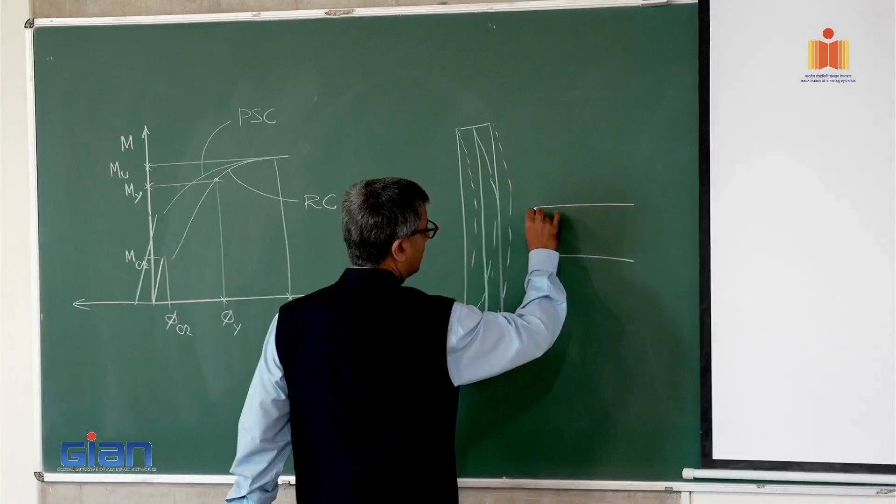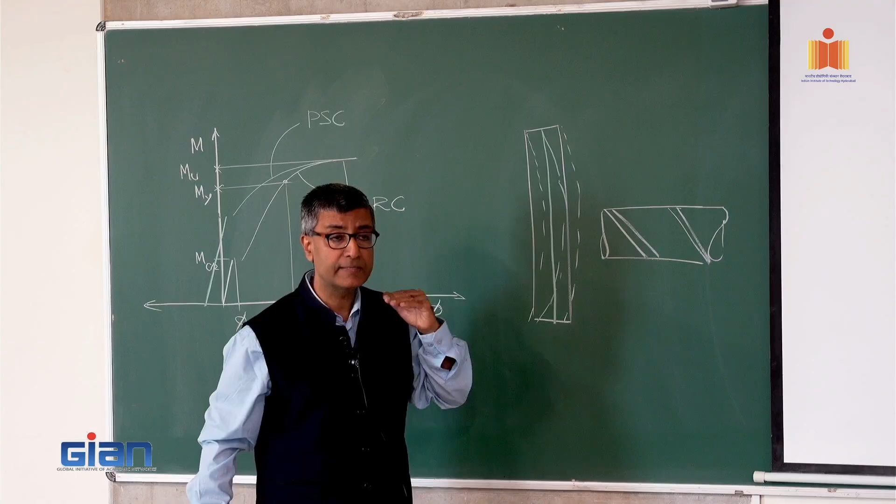You will always see that the duct cross section has corrugations. I'm just trying to show a duct schematic sketch that there are corrugations on the duct. Why are these corrugations provided outside, not inside? Inside we do not provide because it would increase friction, otherwise there will be more friction. Inside is smooth, outside there are corrugations, which is to improve the bond.

That is a must. Actually, precasters prefer metal ducts over HDPE only because the bond is better. The HDPE will have issues, smooth pipes are not recommended, but nowadays there is a tendency even to have corrugations in HDPE also. But the good quality precasters, they always use metal ducts, though it's a little cumbersome to handle.

And the duct size should not be too large. Please note, if your duct size is too large, then obviously your amount of grout is more, and then there are issues of corrosion. That's why if you go into post-tension slabs, ducts are flat ducts, very small depth. Through that you have to pass the strands. And also this grout is a high strength, non-shrink grout.

So typically the bond is much better, if you do it properly, of course. Grout of the grout that we are using in prestress - if you look into the 1343 code, the revision of 2012, the main chapter which was revised was the grouting. A lot of emphasis was placed on the grouting.

The major problem again, corrosion comes from grout only. If you have a lot of chlorides in the grout itself, then you create a passage for corrosion. There are issues which I'm not the right person to discuss, but there is a bit of sedimentation - water in a curved duct tends to accumulate at the top, and from there the corrosion starts.